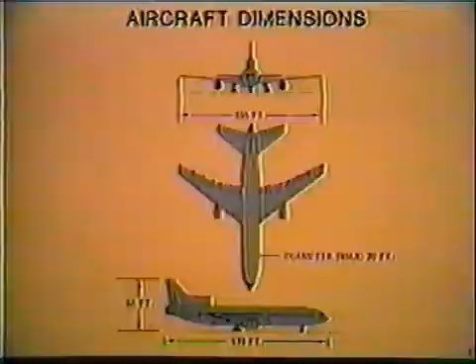The minimum pavement width for a 180-degree turn is 142 feet. This assumes the turn is being initiated with the airplane in motion at approximately idle thrust and no differential braking. It should be noted that the wingtip turning radius is larger than the nose turning radius. Therefore, nose clearance does not ensure wingtip clearance. The tips of the wings are not visible from the flight station.

Due to the high velocity of engine exhaust, consideration must be given to power application in the terminal or ramp areas. Gale force winds of 50 miles per hour exist as much as 100 feet behind an idling engine. This point for a wing-mounted engine would be approximately 20 feet aft of the aircraft tail. For this reason, it is recommended that breakaway power be derived from the wing engines.

At takeoff thrust, wind velocity of 100 miles per hour exists at 300 feet aft of the tail and decreases to approximately 35 miles per hour as far aft as 1,100 feet.

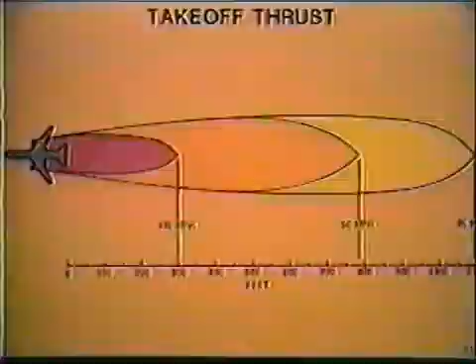The forward cargo compartment, the lower galley, the mid and aft cargo compartments are located in the area under the floor. The forward and mid cargo compartments are for containerized or bulk cargo. The aft cargo compartment is for bulk cargo and pets. All cargo compartments are Class D.

Located under the flight station is the forward avionics compartment, which is accessible in flight by a hatch in the flight station floor. The mid-avionics compartment is located in the center of the fuselage. It, too, is accessible in flight by a door located in the lower galley. The hydraulic compartment is located in the area between the main gear wheel wells. It is a non-pressurized area and is not accessible in flight.

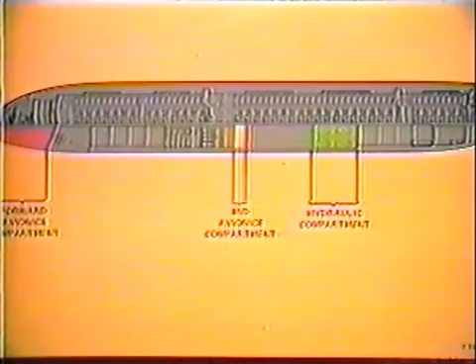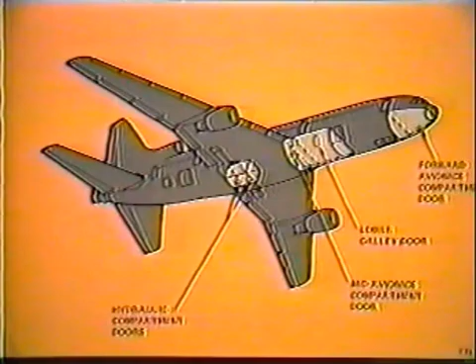Access to the hydraulic compartment is through two doors on the underside of the fuselage. The mid-avionics compartment external access door is under the right wing leading edge. The lower galley door is on the right side of the fuselage, forward of the right wing leading edge. The forward avionics compartment external access door is on the bottom of the fuselage, aft of the radome. This access door can only be opened from outside the aircraft.

All three cargo compartment access doors are on the right side of the aircraft. These doors are normally opened and closed electrically. If a cargo door actuator fails, the door may be manually cranked open or closed by use of a hand crank, stowed in the forward avionics compartment.

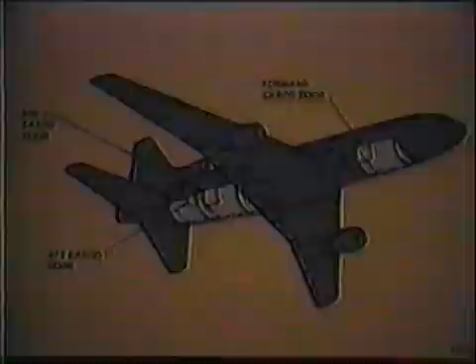Passenger doors are identified as 1 through 4, left and right. For example, the L1 door is the forward left entry door. The first 3 doors on each side are double-width entry doors. The L4 and R4 doors are single-width emergency doors only. They are all plug-type doors.

Flight station. The flight station is arranged in the conventional manner for a crew of 3 with 2 observers.

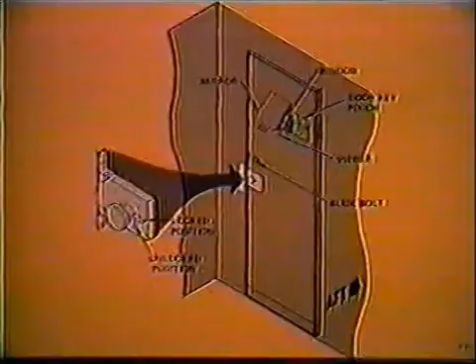The flight station door contains a window that is normally covered by a hinged mirror on the flight station side. Next to the mirror is a key pouch for the flight station door key. Below the mirror is a wide-angle viewer used to scan the cabin aft of the door. A slide bolt is located above the doorknob for positive securing. The doorknob has a key lock on the cabin side and a manual lock lever on the flight station side. The manual lock lever prevents the knob from turning.

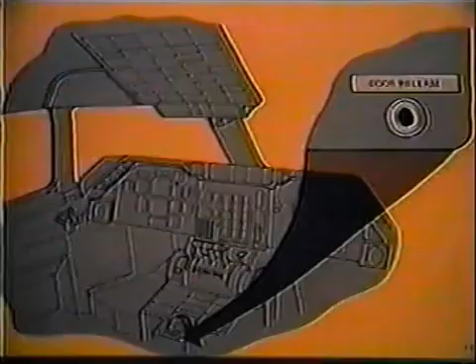The door frame contains a lock plate that houses a solenoid-operated door latch release and a mechanical lock lever. The flight station door is normally held in the locked position by the engaged solenoid. When the solenoid is de-energized, the door latch is released, allowing the door to open. The mechanical lock lever, when moved to the locked position, prevents the door latch from releasing. On the aft right corner of the console is the momentary door release button, which de-energizes the solenoid, allowing the door to open.

Seats for 2 observers are provided in the flight station. The first observer's seat is elevated to provide the occupant with an over-the-shoulder view of pilot activity. Under his seat is stowage space for crew luggage with a retainer strap. Behind the seat is a coat closet. The second observer's seat, adjacent to the entry door, has a folding seat bottom that stows when not in use. On the floor in front of the flight station door is a hatch which provides access to the forward avionics compartment. Fastened to the bottom of this hatch is the MCO pouch.

On the right aft portion of the flight station is a coat closet and a hat shelf. The floor of the coat closet is not to be used for storage, so no retaining straps have been provided. Forward of the coat closet and to the right of the second officer station is a flight kit storage area with a retaining strap.

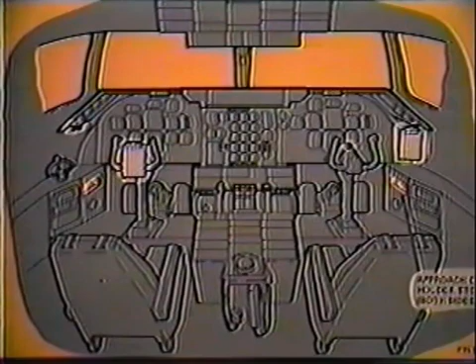Illuminated approach chart holders are stored in the side consoles and can be mounted either on the top of the control columns or on the side consoles.

An eye locator is provided to position the pilots for optimum visibility. With the pilot seat properly positioned, optimum runway visibility and an unobstructed view of the engine and flight instruments is assured. The pilot's eye locator is an illuminated two-way sight mounted below the compass on the windshield center post. The switch on the eyebrow panel controls the light in the eye locator. The eye locator will be demonstrated in the simulator.

With the pilot's position adjusted to the eye locator, forward visibility will be 28 degrees up and 21 degrees down. This means the first visible ground object will be 42 feet in front of the nose.

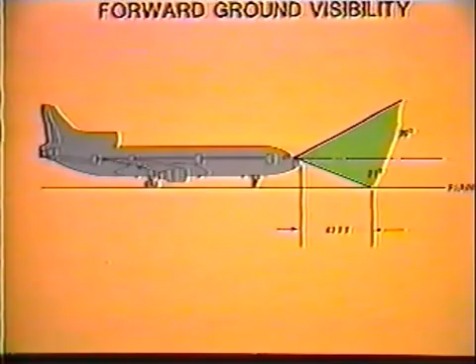On an ILS approach with a reported 1200 RVR at 100 feet, the first visible ground object will be 420 feet in front of the nose, resulting in 780 feet of ground visibility.

At touchdown, with a body angle of 8 degrees, the pilot's eye reference will be 32 feet above the ground. The nose wheel will be 10 feet off the ground, and the first visible ground object will be 130 feet in front of the nose.

During rollout and taxi, the pilot's eye reference is 19 feet above the ground and 22 feet forward of the nose gear. The nearest visible ground object will be 42 feet in front of the nose.

The captain and first officer seats operate identically. Vertical and longitudinal travel adjustments are normally electrically actuated. The same vertical and longitudinal adjustments have manual backup levers. 4 additional manual adjustments are provided: thigh adjustment, lumbar adjustment, recline adjustment, and the armrest adjustment. The seats will be demonstrated in the simulator.

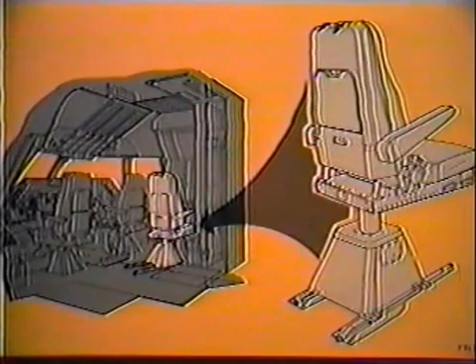The second officer's seat has manual controls and travels along the floor on diagonal tracks. The seat also swivels and has 5 stops. This seat will also be demonstrated in the simulator.

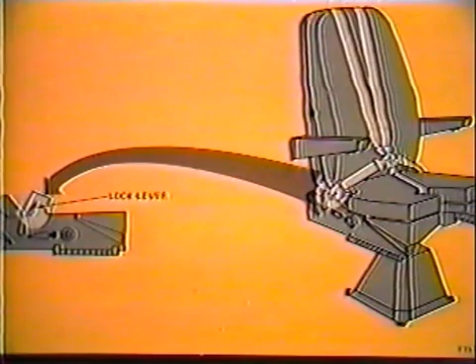All 3 crew member seats have the same restraint system. This consists of a dual shoulder harness with inertia reels, a lap belt with retractors that has lock levers to lock its position, and a crotch strap with retractor is also provided.

The circuit breaker panels are numbered from forward to aft. Circuit breaker panel 1 is over the pilots and is called CB1. Circuit breaker panel 2 is over the second officer and is called CB2. Circuit breaker panel 3 is to the right of the second officer's seat when he is facing the panel and is called CB3.

An alphanumeric grid reference is used to locate individual circuit breakers. Letters are along the right side of the panel, starting with A at the bottom. Numbers are along the bottom of the panel, from left to right, starting with 1. The circuit breaker panel number precedes the reference. For example, circuit breaker 1A7 would be circuit breaker panel 1, row A, column 7.

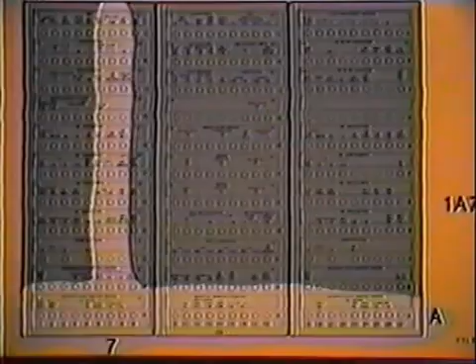Since circuit breaker panel 1 is within reach of both pilots, the left side contains the captain's flight instrument and avionics circuit breakers, and the right side contains the first officer's flight instrument and avionics circuit breakers. The center column contains circuit breakers pertinent to all 3 crew members.

Circuit breaker panel 2 contains those items less critical. The same alphanumeric grid reference is used to locate individual circuit breakers.

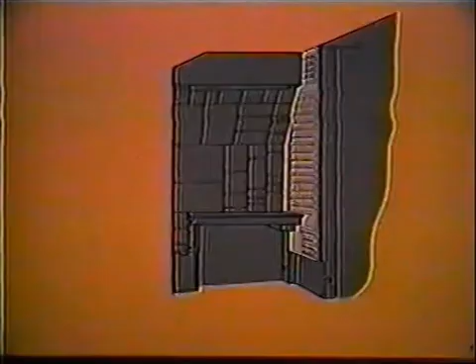Those items which must be readily accessible to the second officer are found on circuit breaker panel 3. Circuit breaker panel 3 also uses the alphanumeric grid reference system to locate individual circuit breakers.

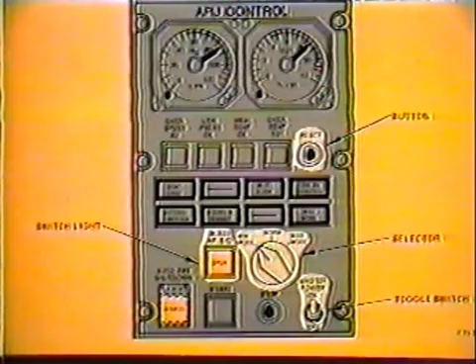Flight station panel switches. There are several different types of switches used on the L-1011. All of these different types can be seen on the APU panel. These types are button, selector, toggle switch, and switch light. The switch light may be new to you, so it will be explained.

A switch light assembly consists of a switch with a lens cap. The lens cap may display a maximum of 2 legends. The message may be either a word, a flow bar, or an in-transit indicator.

A chrome bezel distinguishes a switch. A switch may be of the momentary or latching type. A black bezel distinguishes an indicator only. An indicator has no switch function.

Spare lamps are located in a drawer under the second officer's work table.

Two panels have guarded switches with cautions that must be observed when relamping. The cautions read, "Do not relamp with power on," or "Pull CB 1B14 before relamping."

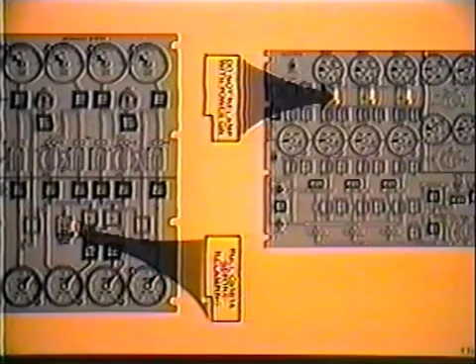When a malfunction occurs that is outside the normal vision of the pilot, a light on the pilot's annunciator panel will flash for 10 seconds, then remain on steady until the fault is corrected. The light from a fault not corrected can be extinguished by pressing the reset button. An exception to this is the green Engine 2 fail-armed light. It is green because it is a normal condition not requiring crew action. It does not flash and will not reset.

The Warning Caution Advisory Light's test switch serves two functions. One is to test all the forward and overhead panel lights and the pilot's annunciator lights. The second function is to recall any light on the pilot's annunciator panel which has previously reset and for which the fault has not been corrected. This light's test will automatically be terminated at the end of 5 minutes to protect the lights from overheating.

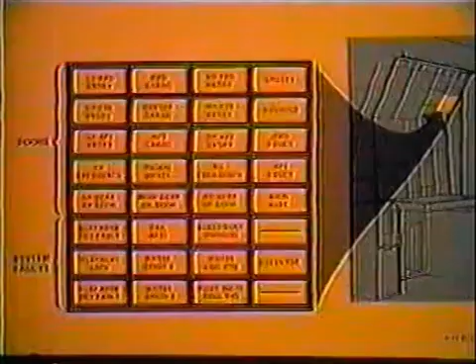The second officer's annunciators are somewhat different from the pilot's in that when activated, these lights illuminate steady and will remain illuminated until the associated door is closed and locked, or the affected system fault is cleared. The upper portion of the second officer's annunciator panel indicates door lock status. The lower portion indicates system faults.

There are a number of aural warnings. Each of these warnings will be covered in their respective sections later in the program.

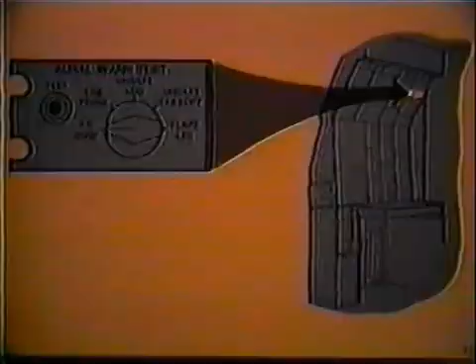An aural warning test panel, located at the second officer's panel, permits testing of certain aural warning sounds. It does not test the system or equipment. When the test button is pressed and held, it will sound the aural warning for the system selected.

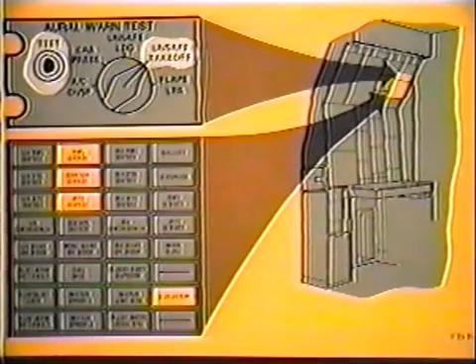The unsafe takeoff position is unique, since it also tests the cargo door open and elevator light circuits for integrity. When selected to unsafe takeoff, pressing the test button will cause the 3 cargo door open lights to illuminate, the elevator light to illuminate, and the unsafe takeoff aural warning to sound. This confirms the system's ability to annunciate if a cargo door was unlocked or open, or if an elevator is jammed. The aural warning sounds as a result of the test only, and will not sound with an actual cargo door open condition. The aural warning will sound with an actual unsafe takeoff condition.

The aircraft has 3 categories of aircraft lighting. Normal interior and exterior lighting is powered from the main aircraft load buses. Instrument standby lighting is powered from the standby bus. Cabin and cockpit emergency lighting is powered by separate battery packs located throughout the cabin and galley.

The captain and first officer's glare shield, utility, instrument, and floodlight controls are at each side of their instrument panel. The center console backlighting and engine instrument panel lighting controls are located below the parking brake knob. The individual cockpit lighting controls will be demonstrated in the simulator.

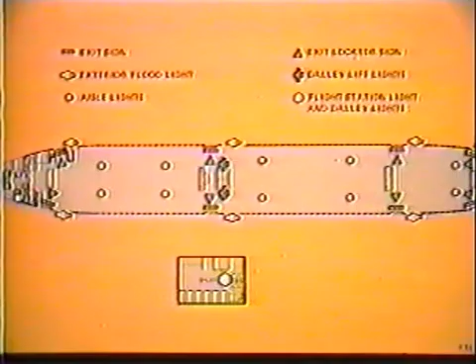The emergency lighting system has several independent battery packs that power lighting for evacuation of the aircraft, including slide raft evacuation areas. Exterior lights.

The exterior lights panel is located on the eyebrow panel and contains all the controls for the exterior lights.

There are 8 position lights installed on the wingtips, 4 on each side. The aft position lights are white. The 2 left position lights are red, and the 2 right position lights are green. When the position light switch is latched, 6 of the 8 position lights are illuminated.

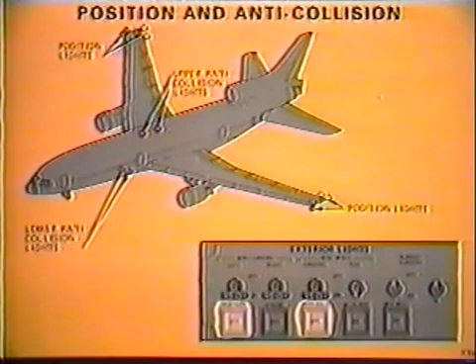The remaining upper red and green position lights will be illuminated when the anti-collision switch is latched. 2 anti-collision lights are located on the top of the fuselage and 2 on the bottom. Strobe lights are located on the leading and trailing edges of each wingtip.

1 fixed position landing light is installed in the leading edge of each wing fuselage fillet. There are 2 fixed position lights on the nose gear that serve as high-intensity landing lights and lower-intensity taxi lights. Runway turn-off lights for side vision are also installed in the wing fuselage fillet directly above the landing lights.

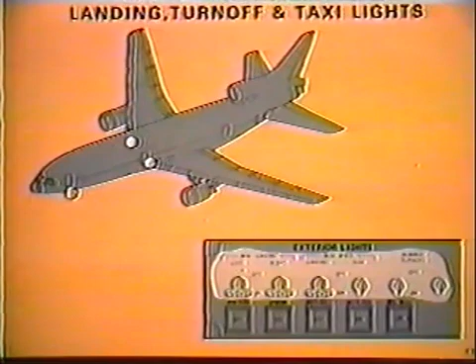Wing floodlights are placed on each forward side of the fuselage to illuminate the wing leading edge and engine areas. Wheel well lights are located at each main landing gear and the nose gear.

Let's take a quick look at the passenger cabin. 2 aisles run the full length of the cabin and are intersected by 4 cross aisles, 1 at each door. There are 12 flight attendant seats in the cabin.

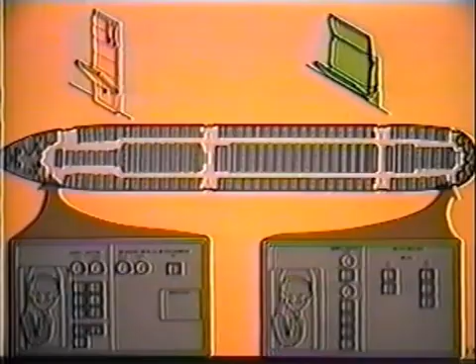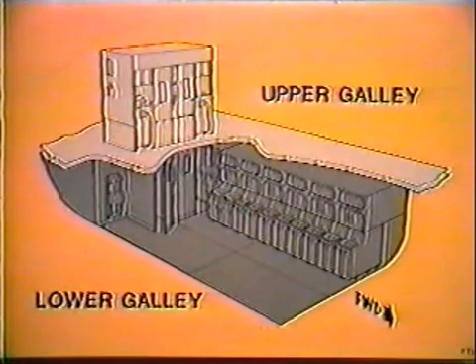There are 7 lavatories, 2 forward and 5 aft in the passenger cabin. In the center of the cabin is the upper galley, shown in amber. The upper galley contains 2 lifts for access between the upper and lower galley. The lower galley is complete with refrigerators, ovens, and storage facilities for all meal and beverage carts.

This is a view of the lower galley looking aft. Above each folding attendant seat is a galley circuit breaker panel. Items found on these panels are basically for cabin and galley equipment. The seat on the left lifts up, providing in-flight access to the mid-avionics compartment.

Two galley lifts provide accessibility between the lower and upper galleys. They are fully independent and may be operated simultaneously. Each lift may transport either one service cart or one attendant in either direction. Internal controls are provided inside each lift. The external directional control switches are located on panels between the enclosures at both the upper and lower galley levels.

The upper galley control panel has a key switch to power both lifts, power either one, or remove all power. The key is located in the upper galley storage compartment.

To operate the lift from the inside, make sure the lift door is shut and latched. Place both hands, one on each assist handle. Place thumbs on the toggle switches above each handle and press and hold both switches simultaneously in the desired direction until the lift comes to a complete stop.

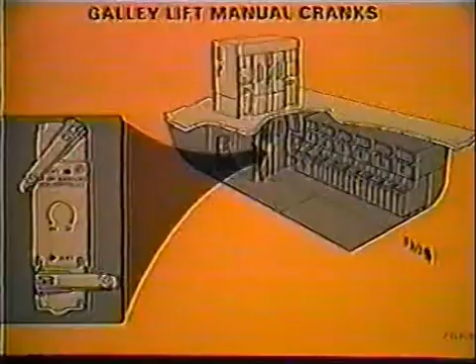Hand cranks are located below the lower galley lift control panel to provide a manual means of raising or lowering the lifts.

Waste system. The wastewater panel is located on the second officer's lower instrument panel. It contains the waste pump indicator lights. The wastewater panel also contains the drain mast heater switches, which will be discussed in the ice and rain protection section.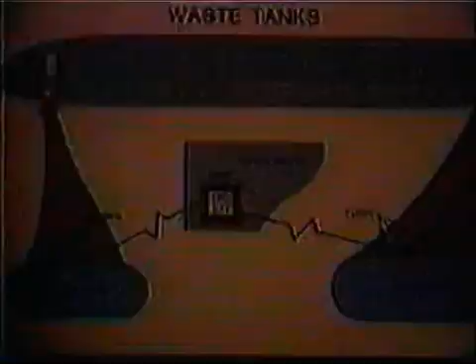There are 2 toilet waste tank systems. The forward system provides waste holding and flushing capabilities for the 2 forward toilets. The aft system also provides waste holding and flushing for the 5 aft toilets and consequently has a larger storage tank. Except for the tank capacity, the systems are identical.

Each system has 3 flushing pumps, which alternately respond to flush signals. If a pump should fail to flush a toilet when signaled, the controller will drop that pump from its sequence and illuminate the appropriate forward or aft wastewater pump light. The next pump in sequence, if available, will be signaled to operate.

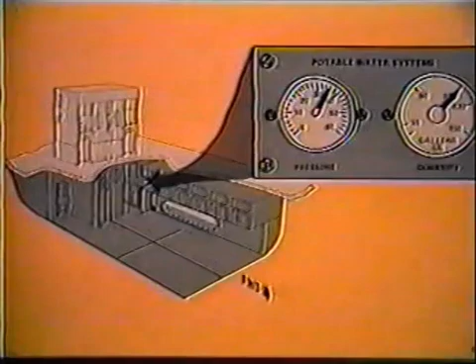Water system. A 150-gallon water tank is located outboard of the lower galley on the left side. When fully serviced, the tank will contain 100 gallons of water. The remaining 50-gallon volume is used for charge air pressure.

2 air compressors pressurize the tank to approximately 35 psi. Both pressure and quantity are indicated on the potable water system panel located next to the lower galley sink.

Two compressors pressurize the water tank. Water then flows forward and aft through individual shutoff valves located directly under the water tank. Additional water shutoff valves are located in the galley lift shaft and at each service center and lavatory. If either water compressor fails, the remaining compressor will continue to pressurize the tank.

The water distribution lines are protected from freezing by dual-element water line heaters in the unheated areas. If one of the heater elements in the water line heaters fail, the other heater element will continue to provide adequate heat.

Lights associated with the water system are the 2 water compressor lights and the water line heater light on the second officer's annunciator panel. If either water compressor fails, its respective legend will illuminate. If one of the dual-element water line heaters fail, the water line heater light will illuminate.

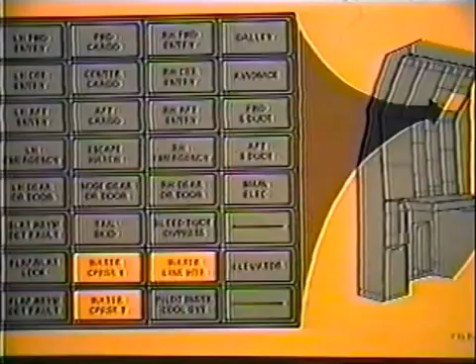The L1011-500 differences will be taught following each subject in which differences do occur. -100, -200 differences for ship number 724 will also be covered when necessary. If nothing is said at the end of a subject, assume both types of airplane, the -100, -200, and the -500, to be the same as the basic -1 airplane.

-500 airplane general differences.

The maximum weights for ship 724 when it is being operated as a -100 airplane are: taxi, 468,000 pounds; takeoff, 466,000 pounds, international operations; 430,000 pounds for domestic operations; landing, 368,000 pounds; zero fuel, 338,000 pounds, subject to certain conditions found in the limitations section of the pilot's operating manual. Fuel capacity, approximately 179,000 pounds.

The maximum weights for ship 724 when it's being operated as a -200 airplane are: taxi, 476,000 pounds; takeoff, 474,000 pounds, international operations; 430,000 pounds, domestic operations; landing, 368,000 pounds; zero fuel, 338,000 pounds, subject again to certain conditions found in the limitations section of the pilot's operating manual. Fuel capacity, approximately 179,000 pounds.

The maximum weights for the -500 aircraft are: taxi, 512,000 pounds; takeoff, 510,000 pounds, international operations; takeoff, 430,000 pounds, domestic operations; landing, 368,000 pounds; zero fuel, 338,000 pounds. Fuel capacity, approximately 212,000 pounds.

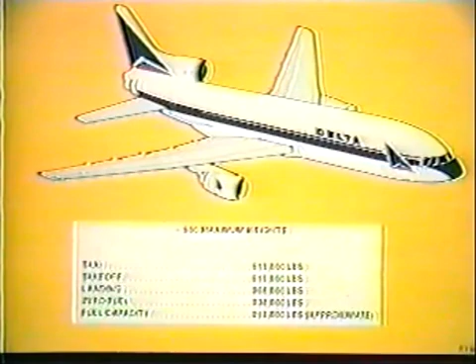The basic fuselage differences of the -500 from the basic -1, -100, -200 aircraft are: the fuselage is shorter. The -500 has only 3 sets of entry doors. The underfloor galley is removed, and the forward cargo door is much larger.

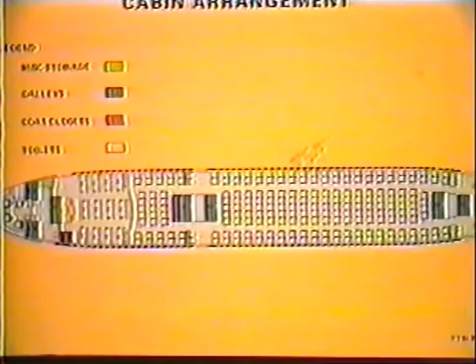Since there is no underfloor galley, 3 galley complexes are located in the passenger cabin. One is located at the number 1 door area, a second one at the number 2 door cross aisle, and a third located in the rear cabin number 3 cross aisle. The lavatories are located in approximately the same place in the forward and rear cabin.

The Dash 500 aircraft has 10 flight attendant jump seats: 4 at the number 1 door cross aisle, 4 at the number 2 door cross aisle, and 2 at the number 3 door cross aisle.

The potable water tank on the Dash 500 aircraft is located near the aft cargo compartment. The quantity and pressure gauges are located on the water service panel on the outside of the airplane below the number 2 right door. This is the same location as it is on the Dash 1 aircraft. The flight attendants on this airplane do not have water quantity and pressure gauges inside the airplane. Consequently, the second officer must check these indications on walk-around.

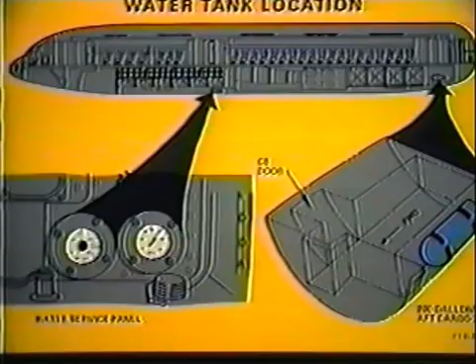The Dash 500 has only 3 pairs of entry doors. All 6 of these doors work just like the forward 6 doors on the Dash 1 aircraft. The forward cargo door is approximately 50% larger and is generally referred to as the C1A cargo door. The C1A cargo door is normally electrically operated. It can also be hand cranked.

2 cargo door warning lights, a forward cargo forward lock light and a forward cargo aft lock light, are installed on the second officer's annunciator panel. They indicate the status of 2 of the 8 door locks. A visual check of the 8 door locks can be made through 8 viewing ports on the bottom edge of the door.

The 2 rear cargo doors on the Dash 500 aircraft, and all 3 cargo doors on all other L-1011s, have viewports installed on the top edge of the cargo door. This viewport, or window, is to be used to visually determine cargo door lock status in the event the cargo door warning light does not extinguish when the door is closed.

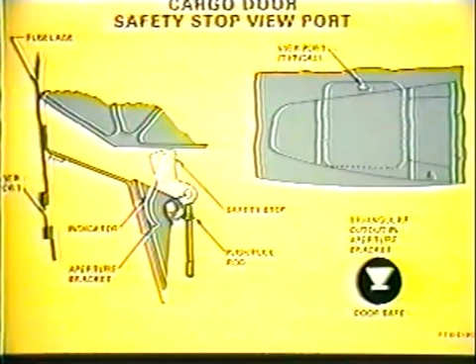This concludes Aircraft General.

The pneumatic system. The pneumatic system control panel is located at the center of the second officer's upper panel.

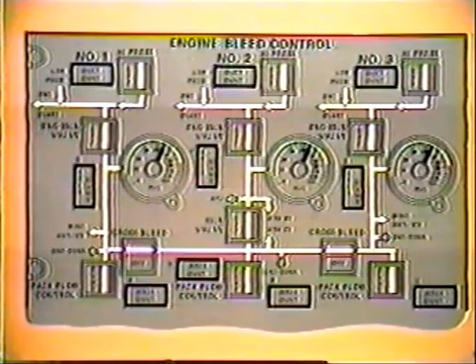The control switches and pneumatic system schematic appear on the panel as shown. Consider the engines to be at the top of the panel, supplying pneumatic pressure to the 3 separate bleed channels down the panel. The 3 channels can be paralleled into a common cross-bleed manifold or isolated from one another by use of the cross-bleed valve switches.

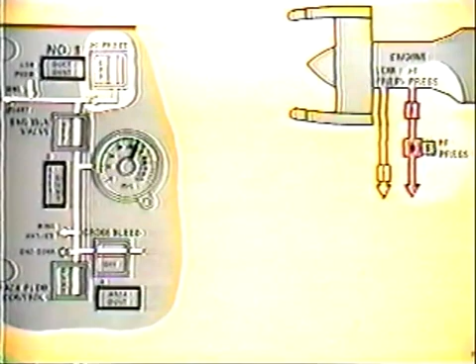Each engine supplies low-pressure bleed air from the N2 compressor for the pneumatic system. This low-pressure bleed air is the primary supply for operation of the pneumatic system. The N3 compressor provides high-pressure bleed air to supplement the low-pressure bleed air when necessary to meet pneumatic system demands. This air is controlled by a high-pressure bleed valve.

Located just above the engine isolation valve is an ejector that mixes high-pressure bleed air and the low-pressure bleed air to satisfy pneumatic system requirements. High-pressure air will be mixed with low-pressure air at low engine power settings. High-pressure air will also be added to supply a higher temperature when using wing anti-icing.

The engine isolation valve, when open, will regulate pressure to approximately 40 psi. When the valve is closed, all pneumatic pressure from that engine is shut off.

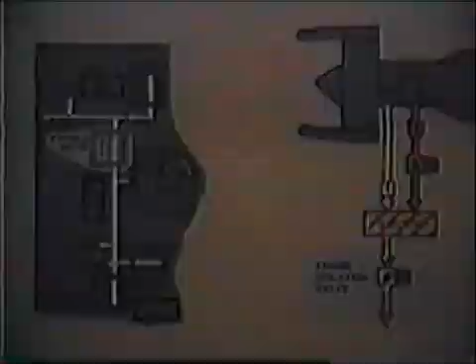The high-pressure and engine isolation valves may be manually controlled using these switch lights on the pneumatic panel. With these switch lights latched, both the high pressure and the engine isolation valves are electrically de-energized and armed to open automatically with pneumatic pressure. The engine isolation valve will open when low pressure air is available.

The high pressure valve will open when high pressure air is available and the pneumatic system demand requires additional air pressure or a higher temperature. The high pressure valve will close any time that the engine isolation valve closes for any reason. The flow bars on these switch lights will illuminate any time the respective valve is open.

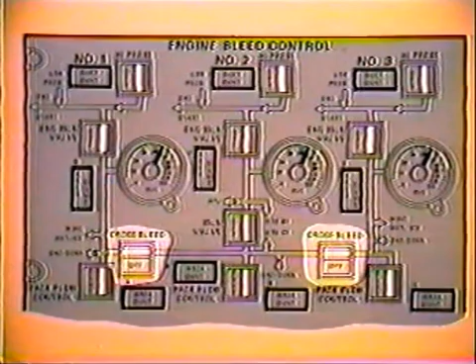The three bleed channels may be interconnected or isolated through the use of cross-bleed valves that are controlled with these cross-bleed switch lights. When the switch lights are latched in, the valves will open when pressure is available on either side of the valve. The flow bar will illuminate when the respective valve is open.

The remaining valve in the pneumatic system is the aft fuselage isolation valve. Its primary function is to provide the capability to isolate portions of the manifold so that a leak in one area would not necessarily cause a loss of pneumatic pressure to both air turbine motors.

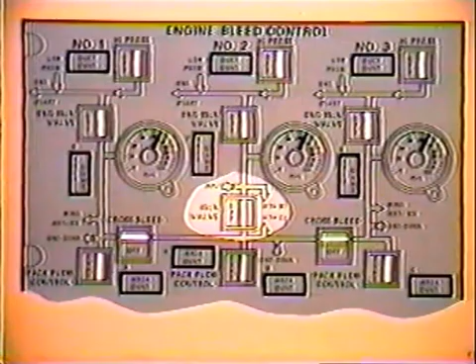Pneumatic pressure supplied by the APU is introduced into the system as shown here. It can be monitored on the number 2 bleed channel pressure indicator any time that the APU bleed air shutoff valve is open. APU pneumatic pressure will also be indicated on the number 1 or number 3 pressure gauges if the appropriate valves are open. Caution: do not mix APU pneumatic pressure with any other air source.

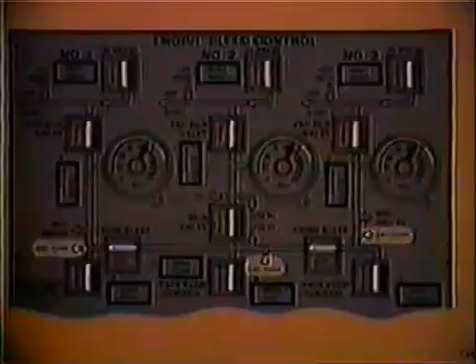Air can be supplied from one or more external pneumatic connections. These connections are indicated by the arrows on the panel. A single channel or the entire manifold may be pressurized depending upon the position of the cross-bleed valves and fuselage isolation valve. Do not mix external pneumatic pressure with any other air source.

The major items supplied by the pneumatic system are all 3 engine starters, wing anti-ice, both air turbine motors, and the 3 air conditioning packs.

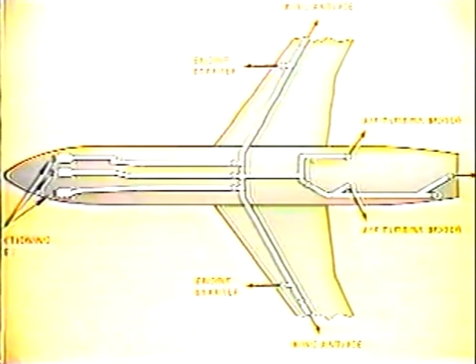These pneumatic subsystems are depicted on the panel. Starting from the top of the panel, they are the engine starters, wing anti-ice, air turbine motors, and the air conditioning packs.

The pneumatic system is provided with several protective functions. Some of these will provide indication only, while some others will take protective action.

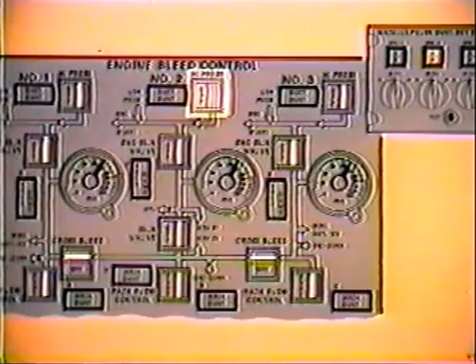The nacelle pylon overheat detection system is designed to detect excessive temperature around the outside of the pneumatic ducting in the nacelle or pylon areas. The high temperature condition could be caused by a leaking high pressure pneumatic duct. This protective system will close and lock the high pressure valve for the appropriate engine.

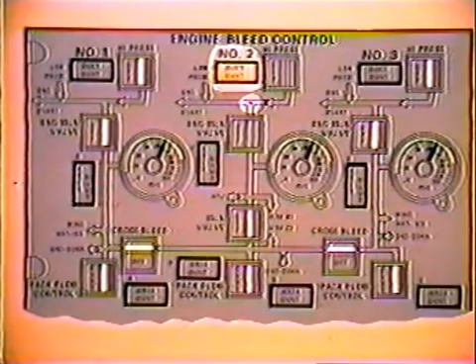The duct overheat system is designed to provide protection in the event of excessive bleed air temperature inside the duct, just above the engine isolation valve. The protective action will be the closing of the high pressure and engine isolation valves. These valves will be locked closed until the duct overheat light extinguishes and the valve switch lights are unlatched and relatched.

There is an overpressure valve located just downstream of each engine isolation valve. The respective valve will close if excessive pressure is sensed in the pneumatic ducting. When the overpressure valve closes, it will cause the engine isolation valve for that channel to lock closed, and the bleed duct overpressure light on the second officer's annunciator panel will also illuminate.

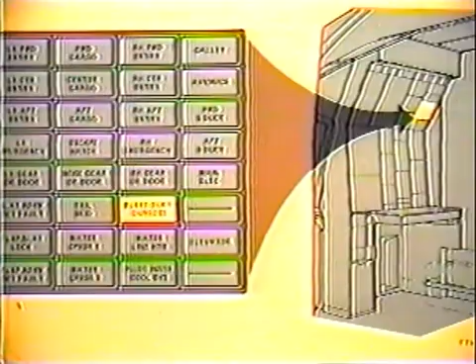The overpressure valve will reopen when the pressure decreases. When the engine isolation valve switch is unlatched, the bleed duct overpressure light will extinguish. The engine isolation valve will reopen if the switch is latched back in. The high pressure valve is not locked closed by the overpressure condition, but the high pressure valve switch light may have to be unlatched if the overpressure occurs again.

There are area overheat lights on the pneumatic panel. These lights provide an indication of excessive temperature around the outside of the pneumatic ducting. The area overheat detection system is a dual-loop detector system. If either loop senses an overheat, such as a leaking pneumatic duct or a shorted detector loop, the affected area overheat light will illuminate. It will also illuminate during a test of the area overheat detection system.

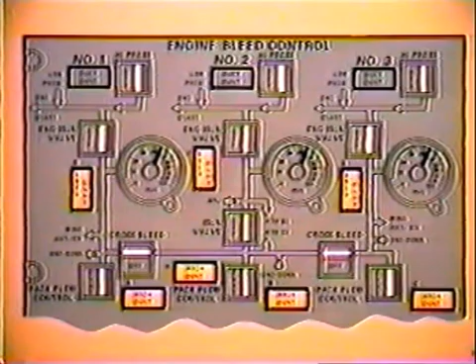The area overheat lights are located on the panel adjacent to the ducting they monitor. The upper three lights on the pneumatic panel monitor the ducting from the number 1, 2, and 3 engines. The left and right lights, identified as D and E, monitor the number 1 and 3 engine ducting. The center light, identified as J, monitors the number 2 engine ducting.

The cross-bleed manifold is monitored by the lower light on the pneumatic panel and is identified as H. The lower 3 lights monitor the ducting from the center section forward to the air conditioning packs and are identified as A, B, and C.

The ducting to the wing anti-ice system from the pylons outboard is also monitored by the area overheat detection system. The anti-ice duct fail lights, located on the overhead switch panel and identified as F and G, monitor this ducting. These letters are intended as an aid in choosing the proper procedure to be followed and for proper identification of the affected area for maintenance use later.

If an overheat rupture occurs anywhere in the D area, the number 1 engine ducting, the E area, the number 3 engine ducting, or the H area, the cross-bleed manifold, valves will automatically close to isolate that individual channel. For instance, if a rupture occurs in the number 1 engine channel, the D area, the number 1 engine isolation valve, the left cross-bleed valve, and the number 1 pack flow control valve will automatically close.

The associated area overheat light will also illuminate. If a reset of these valves is required, all 3 switch lights must be unlatched before any valve can be reopened, after the affected area overheat light has extinguished.

If a leak is detected around the outside of the cross-bleed manifold, the H area, both cross-bleed valves, the fuselage isolation valve, and the number 2 pack flow control valve will automatically close. The associated area overheat light will also illuminate.

If a reset of these valves is required, all 4 associated switch lights must be unlatched before any valve can be reopened, only after the area overheat light has extinguished.

If the number 3 engine channel, the E area, is affected, the number 3 engine isolation valve, the right cross-bleed valve, and the number 3 pack flow control valve will automatically close. The associated area overheat light will also illuminate.

In this case, all 3 switch lights in the affected system must be unlatched before any valve can be reopened, after the affected area overheat light has been extinguished.

An inhibit circuit is built into the D, the E, and the H detection systems to prevent a total pneumatic lockout, an all-valves-closed condition.

If, for instance, a rupture occurred anywhere in the number 3 engine channel, the E detection system would automatically close those affected valves. If, in the remote possibility, an overheat occurred in either the D and/or the H areas, the D and H detectors cannot automatically close those remaining valves until the first overheat had cooled and its light extinguished, thus preventing a total pneumatic lockout.

In summary, 3 of the 9 areas will automatically close valves. They are the number 1 channel, the D area, the number 3 channel, the E area, and the cross-bleed manifold, the H area. These will automatically lock valves closed in their respective channels.

The remaining 6 channels, however, do not close valves. They provide light indications only. They are the number 2 channel, the J area, the 3 air conditioning channels, the A, B, and C areas, and the wing anti-ice ducting, the F and G areas.

Dash 500 pneumatic differences.

If either or both air turbine motors have a run signal and the pneumatic duct pressure drops below approximately 15 psi, the number 2 pack flow control valve will automatically close. When the duct pressure again rises, or both ATMs lose their run signal, the number 2 pack valve will automatically reopen.

This concludes the pneumatics section.

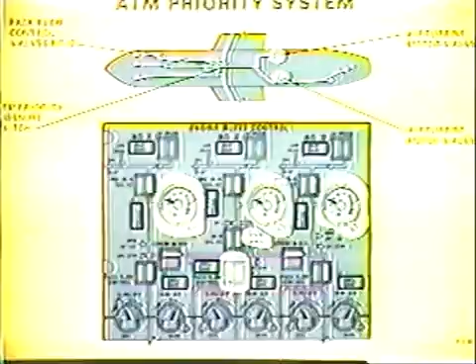Ice and rain protection. During the ice and rain protection program, we will discuss the following subsystems: ice detection, wing anti-ice, engine anti-ice, air data sensor heat, windshield heat and defogging, windshield washer and wipers, rain repellent, and drain mast heat.

Ice detection. The ice detector probe, located on the underside of the aircraft nose, senses ice buildup and illuminates the icing light on the pilot's annunciator panel. The icing light remains on a minimum of 1 minute, or as long as icing conditions exist.

Wing anti-ice. The wing anti-ice control panel is located on the pilot's overhead panel. It contains both automatic and manual controls for wing anti-ice.

Air for the wing anti-ice system is available from the left and right ends of the pneumatic crossbleed manifold. The wing anti-ice valves are electrically controlled and require pneumatic pressure to open. The points at which pneumatic pressure is available for wing anti-ice are depicted here on the pneumatic panel. Note that the left and right ends of the crossbleed manifold must be pressurized for anti-icing to be used on both wings.

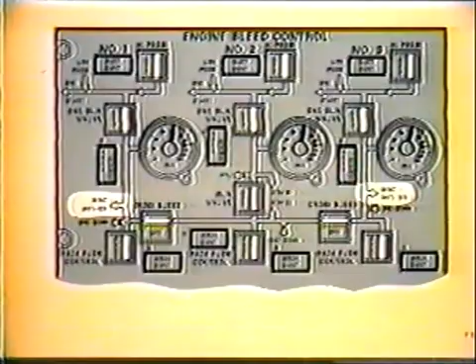There are 2 modes of wing anti-ice operation, auto and manual. With the auto switch latched, on is illuminated, and the wing anti-ice valve is energized to open with bleed air pressure. When the valve does open, the open light will illuminate in the bottom half of the manual switch. The hot air then flows through the inside of the leading edge slats and is vented overboard. The anti-ice valve will modulate to control the temperature to a specified value.

With the manual switch latched, on is illuminated and the wing anti-ice valve is electrically armed and will open when pneumatic pressure is available. The open light illuminates when the valve is open. The valve will remain open in the manual mode regardless of the temperature in the slats.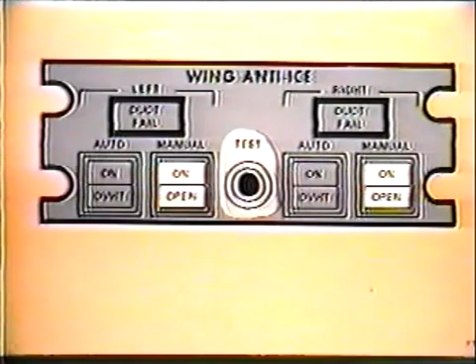The wing anti-ice valves are normally inhibited from opening on the ground by the air-ground sensing system. The test button shown here provides the capability of testing the system while on the ground. When either the automatic or the manual switches are latched and air pressure is available at the individual valves, the open lights will illuminate as the valves open.

The overheat light indicates excessive slat temperature when either the auto or manual mode is in use. The overheat system will not close the anti-ice valve. The switch would have to be unlatched.

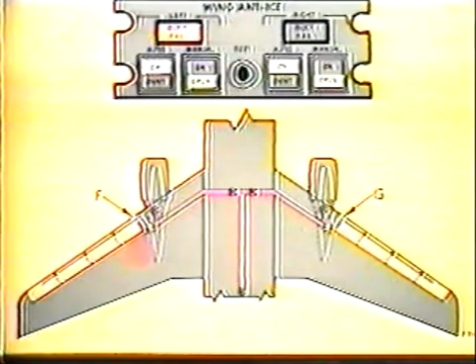The duct fail lights will illuminate to indicate that the temperature in the area around the outside of the wing anti-ice ducting is excessive. A probable cause is a leaking duct. These lights are a part of the area overheat system and are designated as areas F and G.

When a duct fail light illuminates, the area overheat test button and selector switch on the second officer's air conditioning panel are used to determine whether or not the light was illuminated by both overheat detector loops or by one loop only. The area duct overheat light on the pilot's annunciator panel will also illuminate.

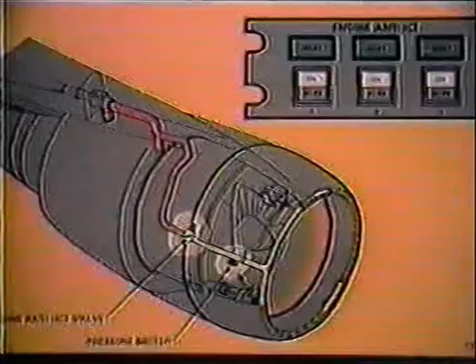Engine anti-ice. The engine anti-ice control panel is located on the pilot's overhead panel. Each engine provides its own low-pressure bleed air for anti-icing. When the engine anti-ice switch is latched, the on light will illuminate to indicate switch position.

The green heat light indicates that there is sufficient pressure in the system. The heat light may not illuminate at ground idle, but should come on as RPM is increased. The heated areas are the nose cowl inlet lip and the EPR probe.

Each engine has a high-pressure relief valve protecting the nose cowl against overpressure. Should the nose cowl pressure increase above normal, the high-pressure light on the engine anti-ice panel will illuminate. The relief valve will vent the excess pressure overboard.

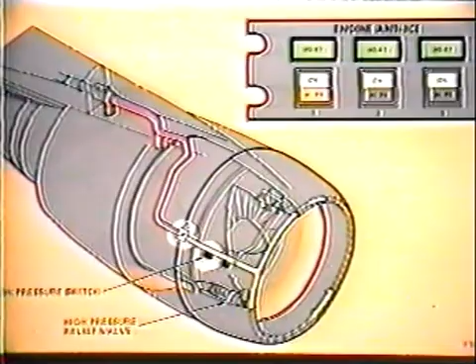Air data sensor heat. The air data sensor heat control panel is located on the pilot's overhead panel.

The pitot-static probes, total air temperature probes, and angle of attack probes on the nose of the aircraft are provided with anti-ice protection.

There is a captain and first officer pitot heat switch on the air data sensor heat panel. When the captain's switch is latched, heat is applied to a left and a right pitot-static probe. The first officer switch also applies heat to a left and a right probe.

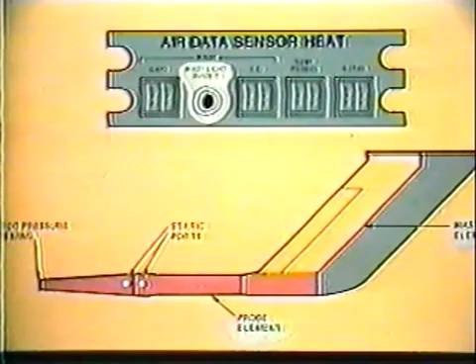Each pitot-static probe has two heaters, one in the probe and one in the mast. Illumination of any of the four off lights indicates that one of the heater elements has failed. The mast light inhibit button is provided to aid in determining which heater has failed.

When the mast light inhibit button is pressed, it inhibits the mast element signal. Therefore, if the mast element has failed, the off legend will extinguish. If the off legend remains illuminated, the probe element has failed. In the example shown here, the probe element has failed, so the off light would remain illuminated with the inhibit button pressed.

Failure of a probe heater in icing conditions could affect pitot and static sensing. A mast heater failure would be of less concern.

There are two total air temperature probes. Each probe contains a single heating element. Each off legend represents a probe. Normally, the switch is latched and dark. When the anti-ice element fails in a temperature probe, the off legend will illuminate. The indication shown here is a heater failure for the left temperature probe.

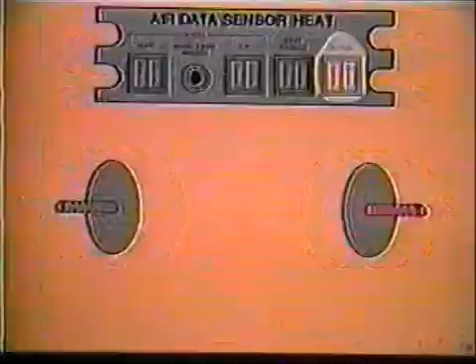When the alpha heat switch is latched, the heaters are operating for the left and right alpha probes. Due to the design of the system, the heaters must reach a specified temperature before the off lights will extinguish in the alpha heat switch. Therefore, it is normal for the off lights to remain illuminated for a short period of time after the switch is latched, and to remain extinguished for a short time when the switch is unlatched. The indication shown here is a failure of the left alpha heater.

Windshield heat and defog.

The windshield heat control panel is located on the pilot's overhead panel. With the captain's or first officer's windshield heat switch unlatched, the idle legend is illuminated. Low temperature heat is being applied to the captain's and first officer's windshield. High heat is applied to the captain's and first officer's forward windshield when the switches are latched and dark.

The side windows operate at one temperature. Normally, the switches are latched and dark. Fault lights indicate a malfunction of the windshield heat system.

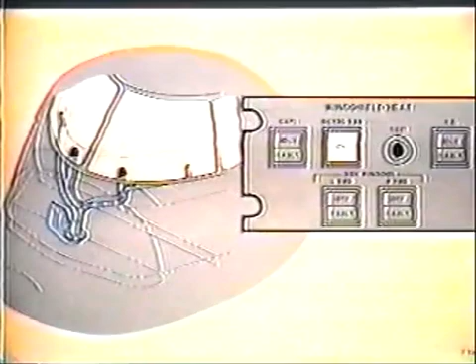The windshield defog fan circulates flight station air onto the windshields. Because of a considerable air blast with this fan, it is advisable to guard the eyes before latching the switch. It may raise some dust.

Windshield washer and wipers.

Both the captain and first officer have windshield wiper control panels located in the pilot's overhead panel. However, only the captain's panel contains a washer switch light. The washer switch, when pressed, pressurizes the windshield washer system and illuminates the pump on light. Pressing the switch again turns off the pump and extinguishes the pump on light.

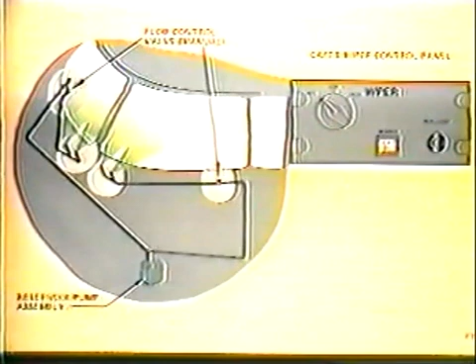A combination reservoir pump is located in the forward avionic compartment. The reservoir holds approximately 1 gallon of fluid, which is routed from the reservoir pump through a manually controlled flow control valve for each windshield to the spray nozzles.

A windshield washer flow control valve is located at each pilot's side console. These valves provide selective fluid flow to each windshield after the pump has been turned on at the captain's wiper panel.

The windshield wiper control is a 3-position selector that turns on and controls the speed of the captain's windshield wiper. The first officer has an identical control for his windshield.

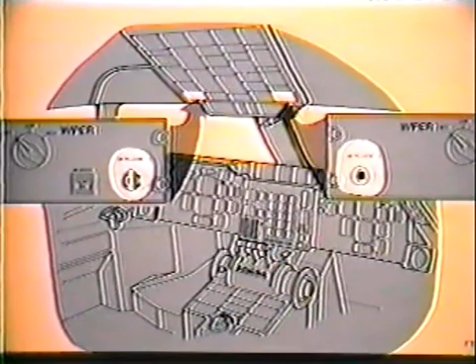The rain repellent switches are on the windshield wiper control panels. Pressure for the rain repellent system comes from a pressurized can located at the aft end of the captain's side console.

Actuation of the repellent switch ejects a measured amount of fluid onto that windshield. If more fluid is desired, press the repellent switch again. Holding the repellent switch will not create a continuous flow of fluid.

Depending upon airspeed and rain conditions, each actuation should be adequate for 2 to 5 minutes. Approximately 75 applications are available in a fully charged repellent container. Rain repellent should only be applied in heavy rain with the windshield wipers on, and should be applied to only one windshield at a time.

The rain repellent pressure gauge has a red and green arc. There is also a refill sight gauge below the pressure gauge. If the pressure gauge indicates in the red, or the refill float is in view, the system requires servicing.

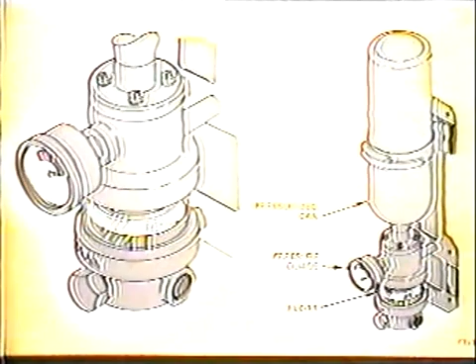2 wastewater drain masts are located on the underside of the fuselage to drain the galley and lavatory sinks. Each drain mast contains 2 heating elements. The masts are heated to a rather high temperature and are labeled hot, do not touch.

The wastewater panel is located on the second officer's panel.

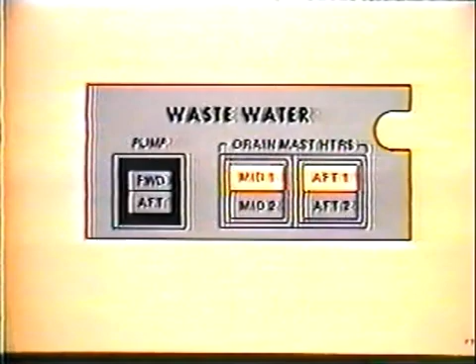The drain mast heater switches are normally latched. The number 1 heating elements are on and the number 2 heating elements are off. In the event of a failure, the number 1 legend will illuminate. Unlatching the drain mast heater switches will extinguish the number 1 legend and power the number 2 heating element. In the event of a number 2 heater failure, the number 2 legend will illuminate.

This concludes ice and rain protection.

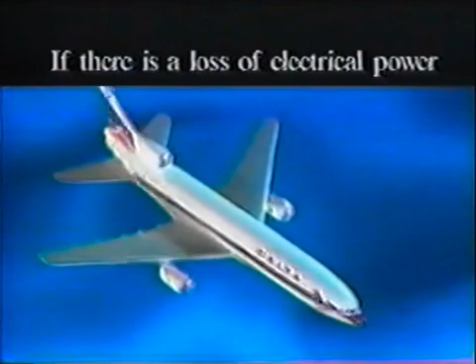Exits on the L-1011 are 8 doors, 4 on each side of the aircraft. If there is a loss of electrical power, emergency track lighting installed near the floor will illuminate. White lights lead to red lights, which indicate the exit. Please take a moment to look around and locate the exit nearest your seat.

And be aware, your closest exit may be behind you. A portion of this flight will be over water, so we'd like to acquaint you with the location and use of flotation equipment. A life vest is located in a pouch beside or under your seat.

Remove the vest from the pouch by pulling on the tab. Place the vest over your head and fasten the straps to the front of the vest. Adjust the straps loosely around your waist.

For a small child, pull the vest over the child's head, with the back piece fully extended. Bring the straps up between the child's legs and clip in front. Tie the excess straps loosely around the waist.

Do not inflate the vest inside the aircraft. As you leave the aircraft, pull down on the red tabs to inflate the vest. The vest can also be inflated by blowing into the tubes on either side.